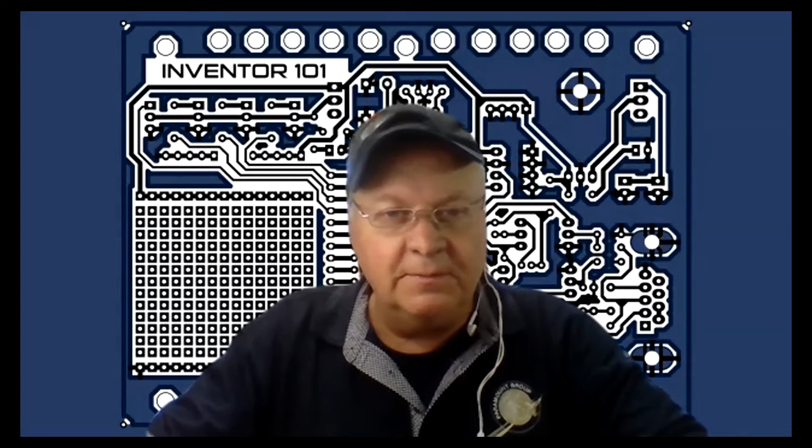Last week, we were busy making this item here. This is a baseboard. So you have various options. If you're getting started with robotics, what you can do is you can acquire this part. This red board over here is, in fact, the main board from this robot.

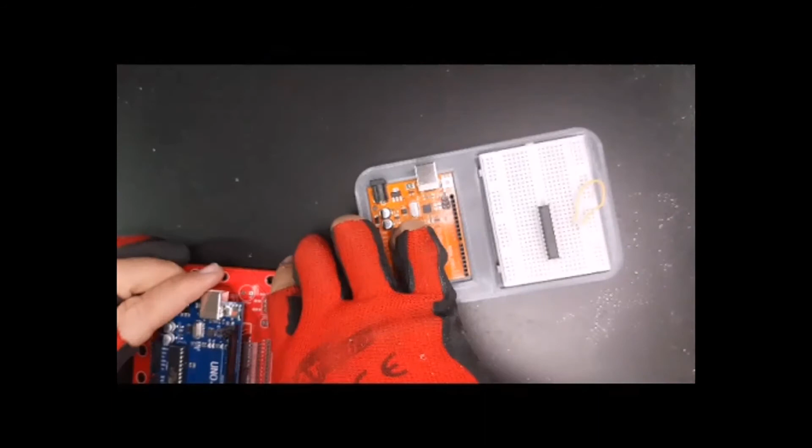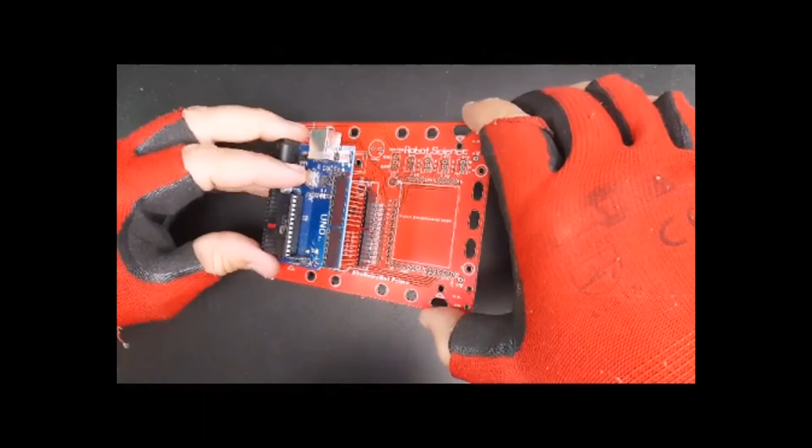But before you build this out into a robot, what we can do is we can just get a hold of this board. In a previous video, we soldered on these header pins here. And then what we did is we put this Arduino Uno that has the long pins underneath it, and we put this on here like this, so we can start programming on this Arduino Uno without the pins short-circuiting and getting damaged.

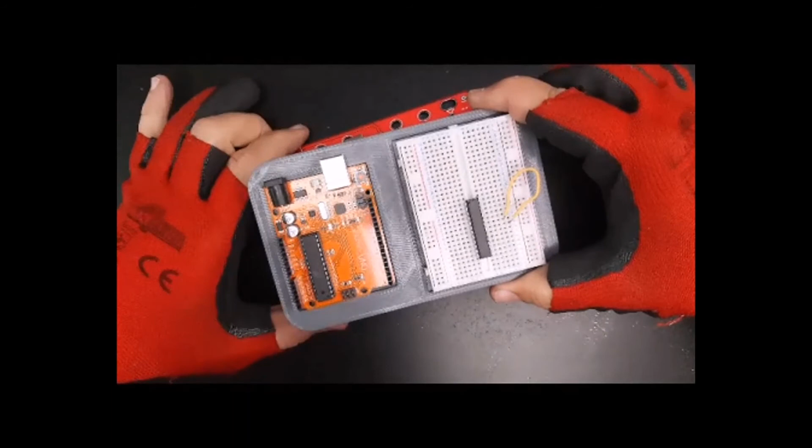We can also put a breadboard over here. What I wanted to do was just design something in Fusion 360 where we've got a bigger breadboard here. We've got the Arduino over there. We've got a little bit of Prestik underneath here. The breadboard is actually permanently attached to this piece of plastic base with double-sided tape. So what we can do here, we can screw this thing in place, or we can just stick it down with a piece of Prestik.

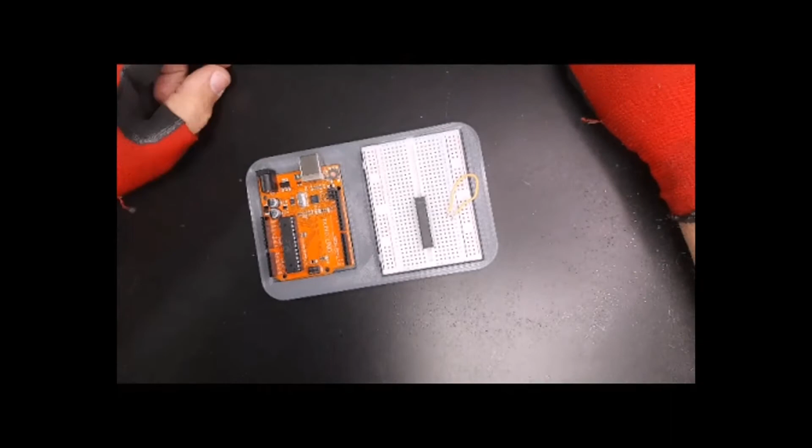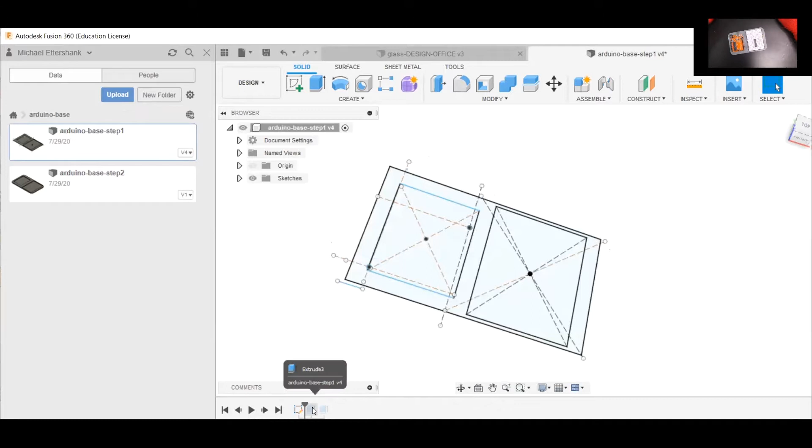So what we're going to do now is we're going to go to a shared screen. This is what we were busy with last week. Move that around a bit. So now hopefully you can see everything that's going on my screen. So if we go back to the very beginning, you'll see there's nothing there. So the first step was in fact to create this drawing. Step number one, we drew the sketch. We drew the blocks on the inside and the outside.

The next step is we extruded the frame 5 millimeters. The next step was we extruded these inner pieces by 2 millimeters. So the main part is 2 millimeters extruded up, and then the frame is 5 millimeters extruded up. The next step is basically to give it these rounded corners.

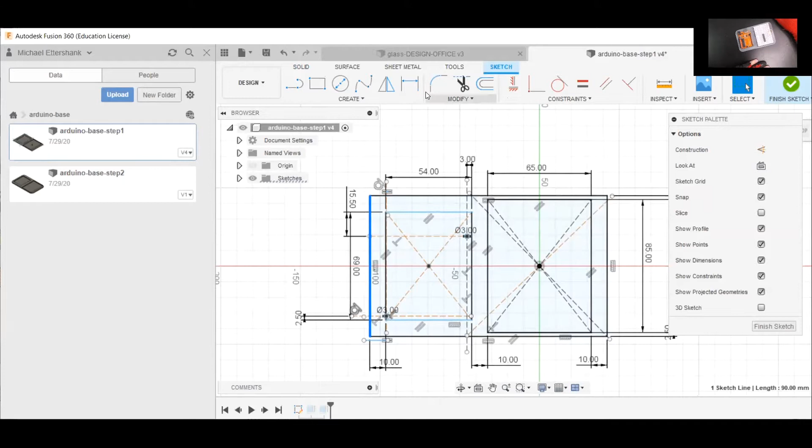So what's happening here is we do a right click on the sketch and we go to edit sketch. And then you'll see there's a fillet function over here. So let's click on the fillet function and we click there and you'll see here it's filleting it, but we don't want it to be so dramatically filleted, so we can click on 5 millimeters and you'll see it gives it less of a corner over there.

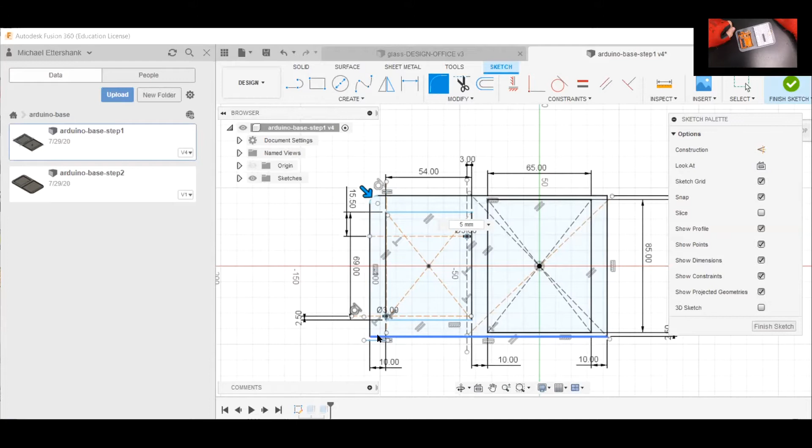So now we go around and we can click over here and it does the same over there, and we go over here and we go over there. So you need to click 2 lines on a square to get a filleted effect. When we click Finish Sketch, what you'll notice now is that this board that we made has got these filleted corners. Now, what we can also do is we can add an extra step here.

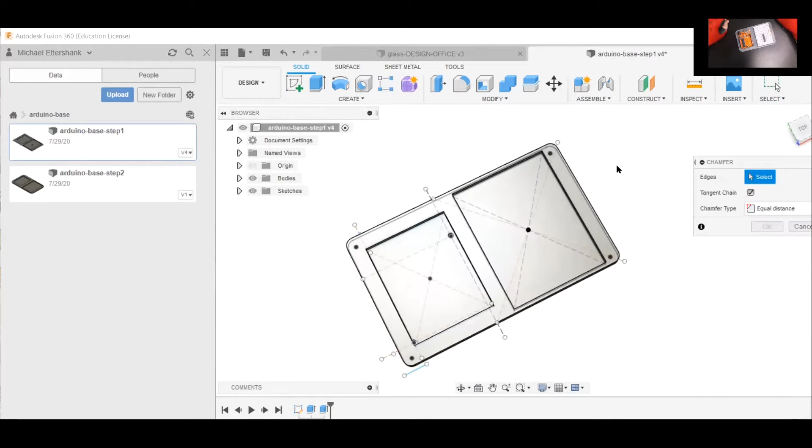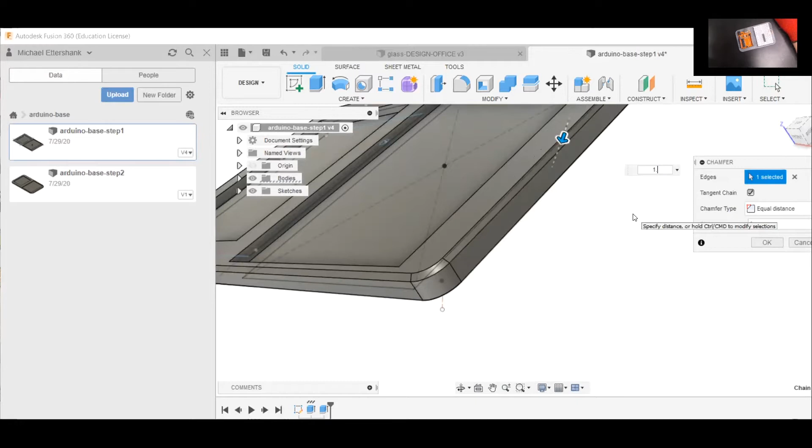So that extra step is we can go here to Modify and we can go to Chamfer. And now, if we click on this line here, it will chamfer this by the amount that we dial in over there. We probably don't want something as dramatic as a 3 millimeter chamfer. You can see that's quite dramatic if I zoom in there. So let's change this number to 2. You'll see it's still quite a strong chamfer there. But let's try, say, 1.4 millimeters. And that's a pretty good effect as far as our chamfer goes, so that's quite handsome.

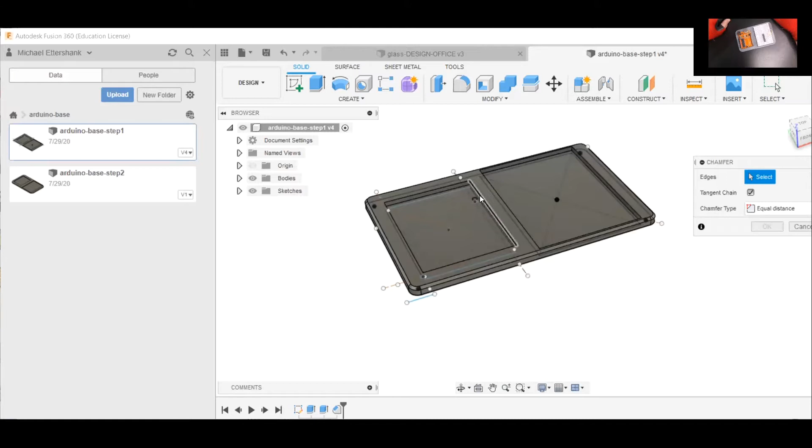What we can also do is we can fillet, that's a fillet, or a chamfer is the square one. We can do the same effect on these lines here. So let's zoom in a little bit and let's do like so. So we click there and we click there and we click there and we click there. So those are the lines that we've included in the chamfer. We can do 2 mils, that's quite strong. So let's maybe do 1.

And now, if we want to include these lines, you can hold the control key down. So if you hover there and you try and click there, it won't include that line because you've already put a value in over here. So if you hold the control key down and you click on that chamfer effect, you'll see that it's inactive.

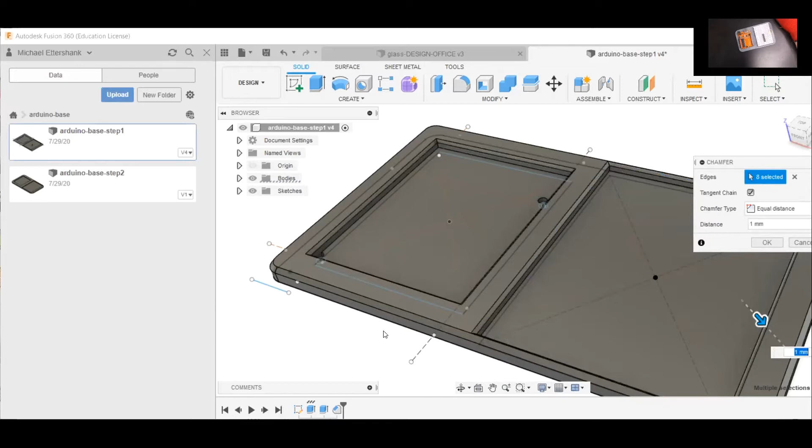If you hold the control key down, it becomes activated or active. So now we've got our chamfers in place, and I think that chamfer is quite strong, so let's go down to 0.75. The reason for that is I just didn't want it to be making a complete V shape over there.

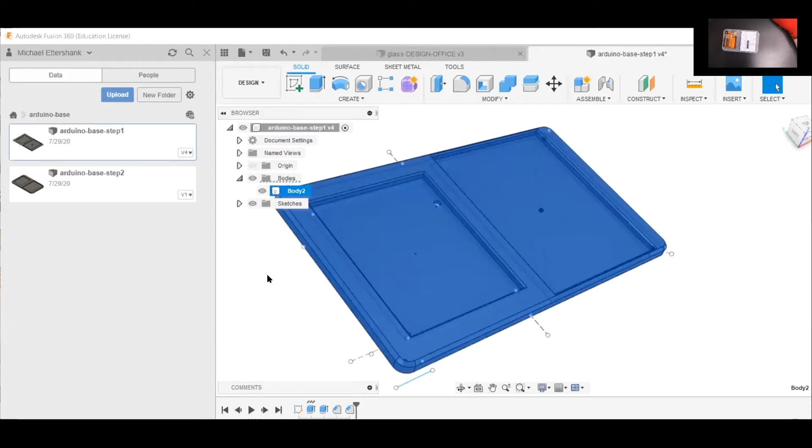You'll see there it's called body 2. This whole part here that's highlighted in blue, you'll see it's gray. When I click there, it highlights that part, that's the body. And if I click here, you'll see this is the sketch. So we can switch the sketches off and on over there, or here we can hide the sketches. Let's get rid of that. We can also hide the body in both places.

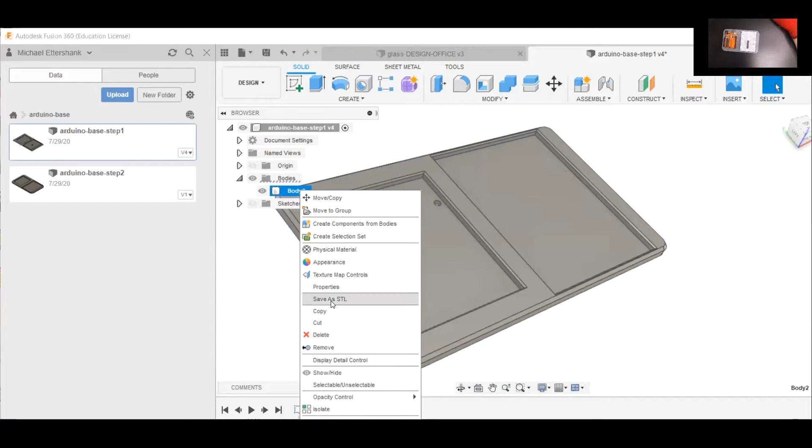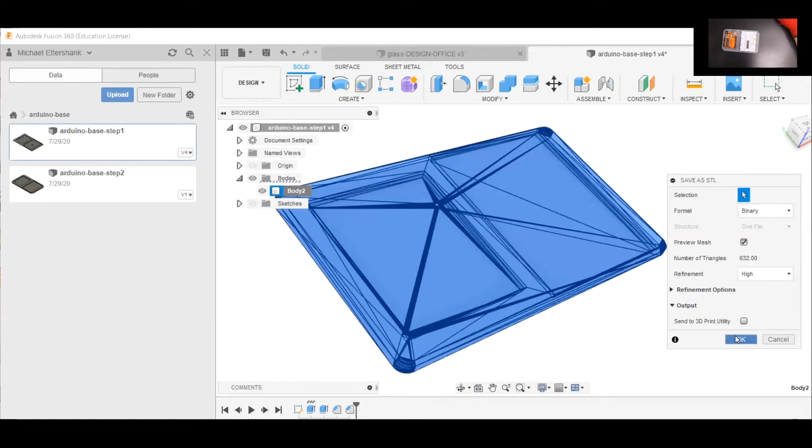But what we need to do now is right click on that body, and it says here, save as an STL file. You'll notice it's now trying to save it as an STL file. So let's have a look at the Save as STL options. You can see we can change this, but I'm going to leave it as a high-res file, and I'll go OK. What it does now is open a save dialog, and we can drag this over here, like so, to there.

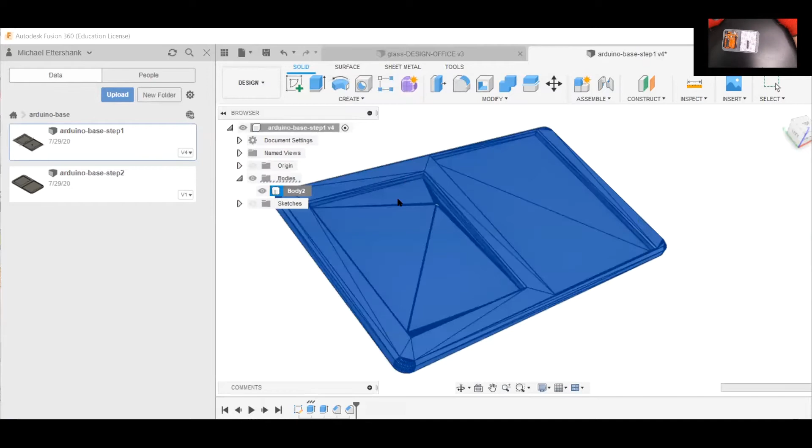And now, under Models, so under my CAD CAM CNC, we've got models here. I'm looking for a model, Arduino baseboard. There's an STL file there, but let's call this version 2, rather than overwriting that one. So now we've saved this effectively as an STL, or a 3D file.

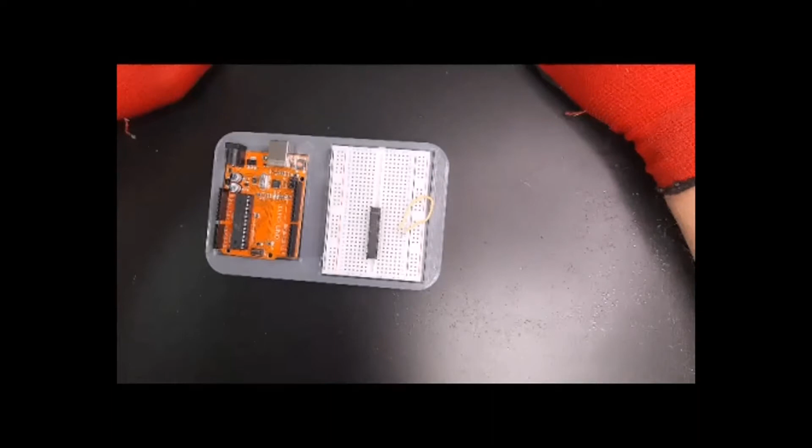Now what we do is go over to a software called Cura, C-U-R-A. What you're looking at there is Ultimaker Cura. I'm just going to clear out that model out of the way there. Ultimaker Cura is called a slicer software, so that's where you take a 3-dimensional STL file and you set it up to print on the 3D printer.

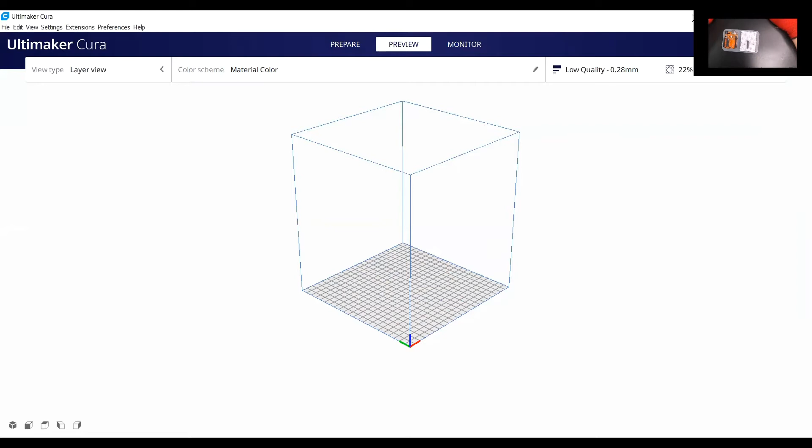The first thing you really do with Cura is make sure the software is set up for your particular type of 3D printer. So I'm just going to pull it up to here so I can see from the top to the bottom of the screen.

So you're looking at Ultimaker Cura now, and you'll see here it says prepare, preview, and monitor. We are going to go to the prepare function. Over here you'll see we've selected a Creality CR20 printer, that's the particular type of printer we're using.

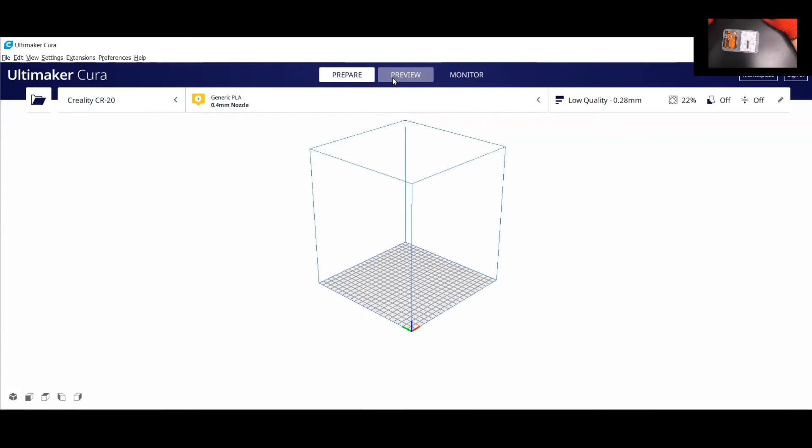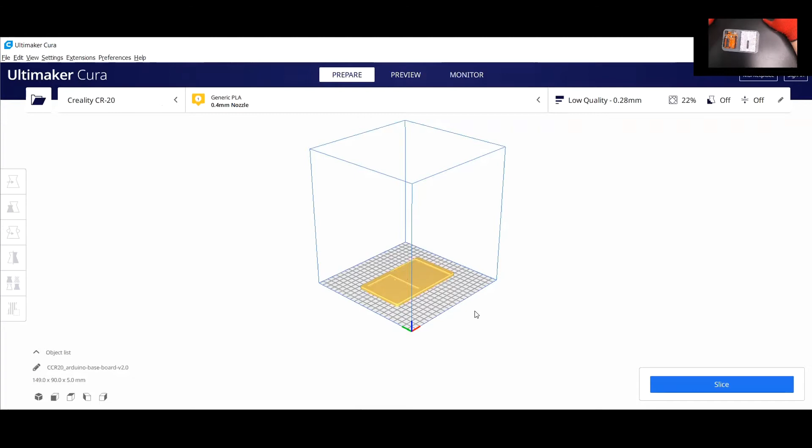What we need to do is bring that model in. So we go to wherever you've stored your files, look for models, and we're looking for the Arduino baseboard model. You'll see here, there it is, that's Arduino baseboard version 2. We click on that and open it, and it actually brought it in there. So what you'll see is there it is. That, folks, is our baseboard.

It's a relatively simple design. Smaller designs are ideal for newcomers. Something useful around the house or your workshop, I can recommend.

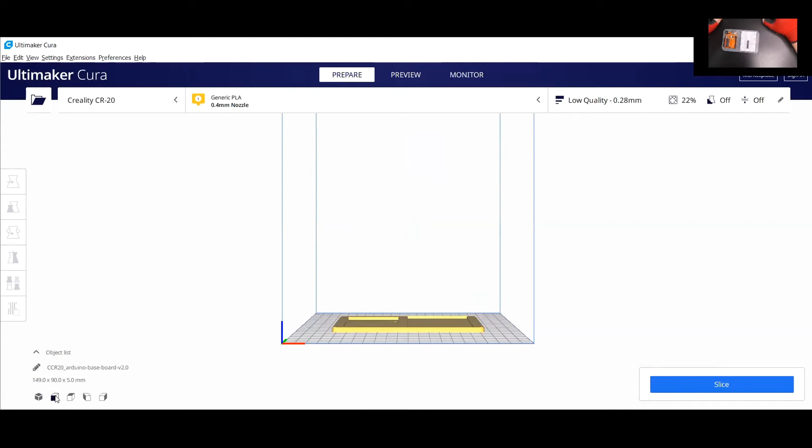And these are the different views, folks. That is a front-on view, that's an overhead view—I'm using the middle wheel of my mouse to scroll around here. This is a side view from one side, side view from the other side. So you'll see it says right view, left view, and this is an isometric view.

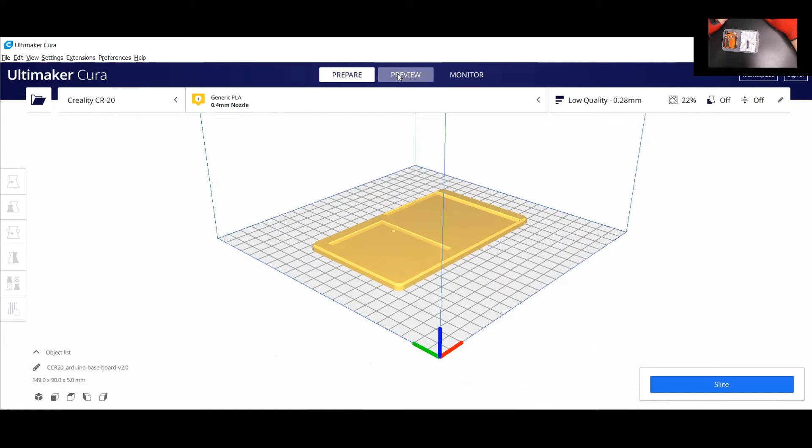So when we zoom in on this part, you can see the actual part itself in the preparation view. If we go to the preview view, then over here there's a button that says slice. Now this model has been sliced—in other words, it's been rearranged so that the 3D printer can print it.

And if we drag this down, you'll see layer by layer, because 3D printers work through deposition of filament. You'll see this is 3 hours and 58 minutes to print. And over here, this is actually recording the different layers. So this is quite a thin model, it's only comprised of 17 layers.

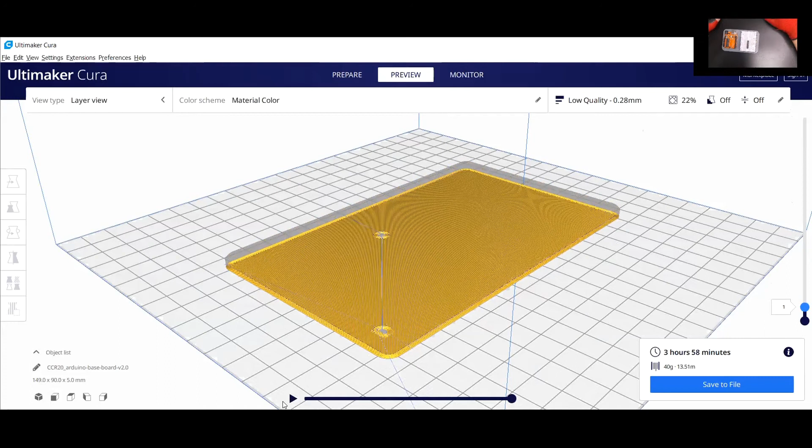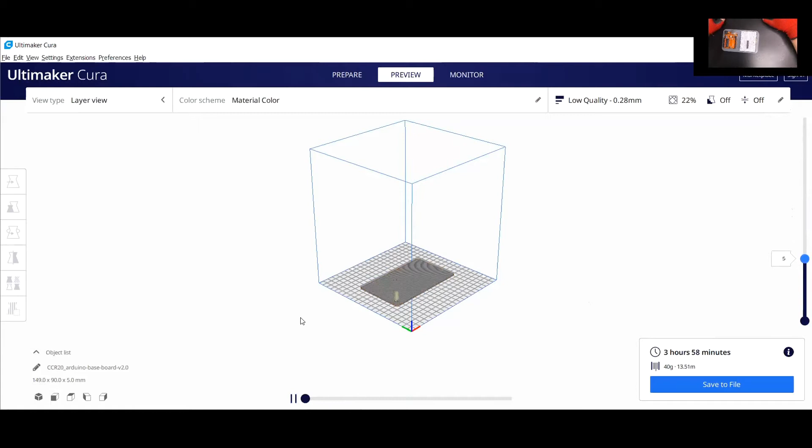If we go down to layer 1 and hit this play button, you can literally watch how the 3D printer puts the filament down onto the bed. It's quite interesting to see. Let's go halfway, say layer number 5, and press play, and we can zoom in and literally have a look at how the 3D printer creates your 3D model by clicking on the different layers.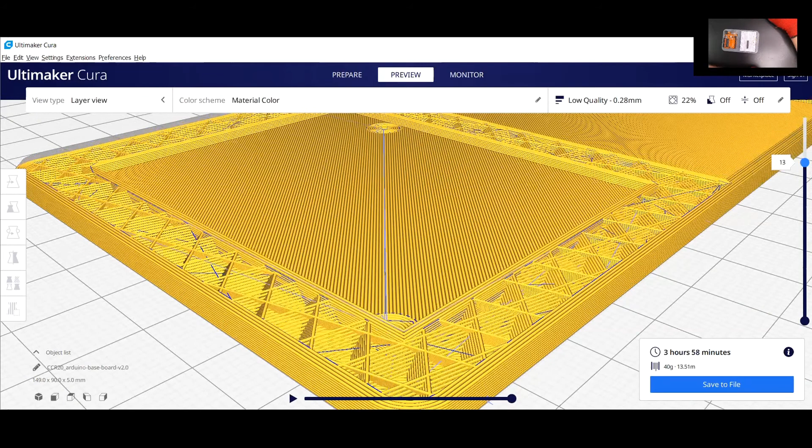So what I'm going to do is walk you through the different functions of Cura, because there's a lot of different settings in Cura with regards to the heat, temperature, and speed of the 3D printer.

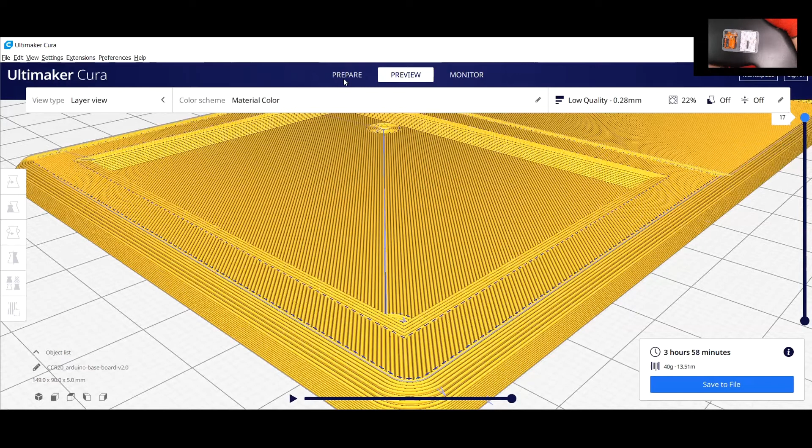So let's assume that everything here is fine and good. You can look at this, this is what the model looks like finished, but in more detail if you click on this prepare view, that's your preparation view, and this is your slice preview view.

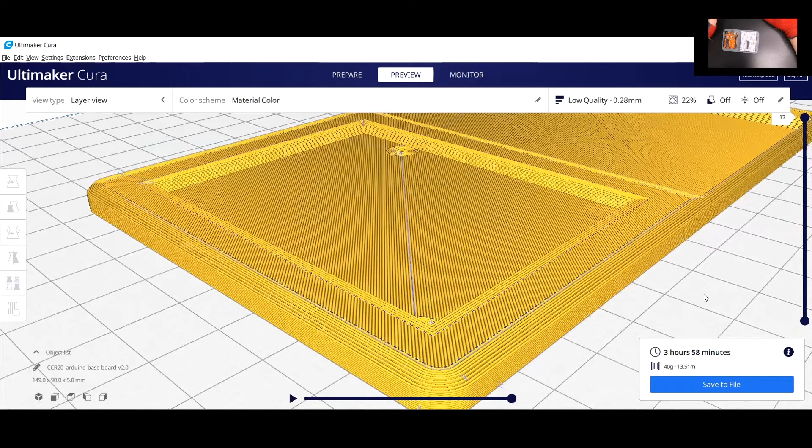And what you're seeing there on the screen is actually how the filament is laid down. It's melted - the 3D printer works through heat, it heats up the filament. It's almost like a very precise, high precision hot glue gun. That's how it works essentially.

And this is an overhead view where you can zoom in and look at the individual lines. There you can see those little stripes and how it builds up this part layer by layer. It's fascinating. Even if you don't have a 3D printer, I'd encourage you to get a subscription to Fusion 360 - it's free - and download the Cura software and start slicing your model, start figuring it out.

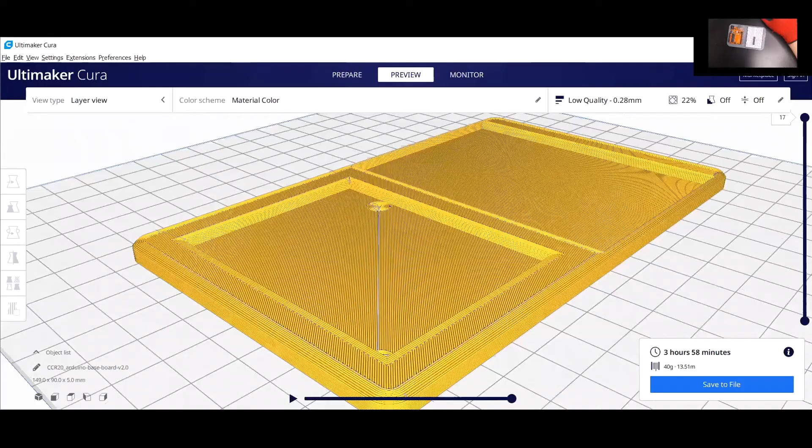Let's go down halfway through the model. So here you'll see this - this is a hollow fill over here. So you can save on printing time and save on filament by going there.

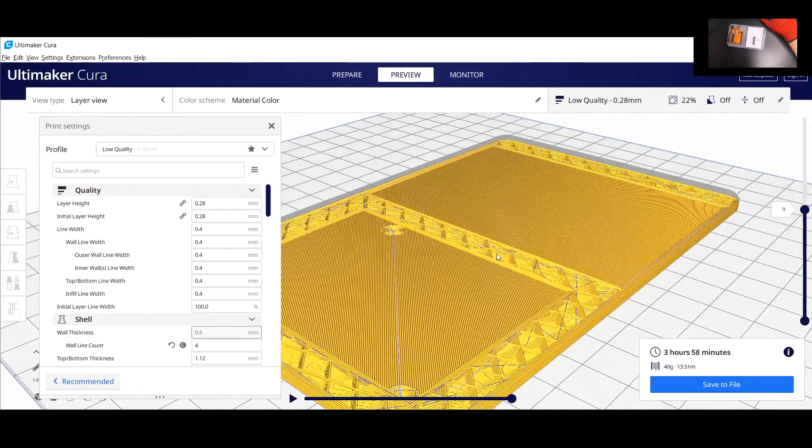Now, these are your print settings - there's a lot of settings here. We've zoomed in on our print settings on that side of the screen. I'm going to move this model a little bit that way, so hopefully we can see everything all at the same time. And now I'm going to find somewhere else to put this item over there.

Let's go through these. So you've got headlines like quality, shell, infill, material, speed, travel, cooling, support, build plate adhesion, and then you've got some experimental settings. These are the main headlines, the main things you have to consider when you are doing 3D printing.

Quality relates to the thickness of the layers. I'm just sticking with some of the presets that are acceptable for this printer, and I'd recommend you do the same - if you're unsure, stick with the default. So what have we got here? We've got layers of 0.28 millimeters. Now, if you don't mind waiting a long time for this model to print, you could change that to 0.2 or 0.1 or 0.25, but for me, 0.28 is perfectly acceptable, so we stick with that.

Your line width - you'll see over here when I hover the mouse, it gives you these little dialog boxes which explain what these things mean. Rather than getting too bogged down in all of this, let's just accept that all of this is pretty good, and let's go out of there and go here.

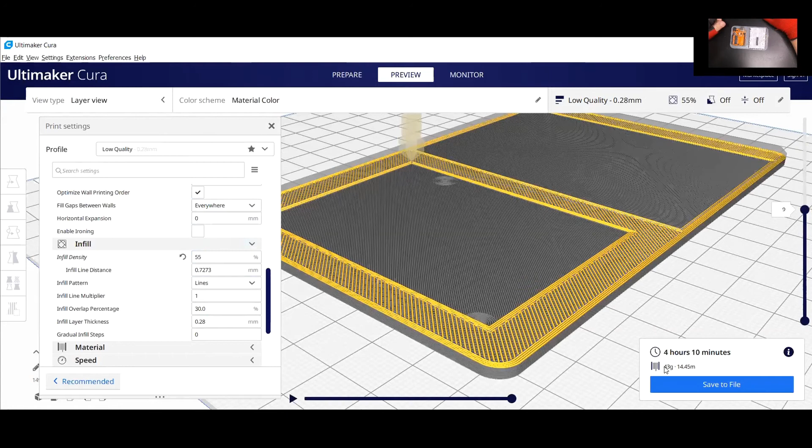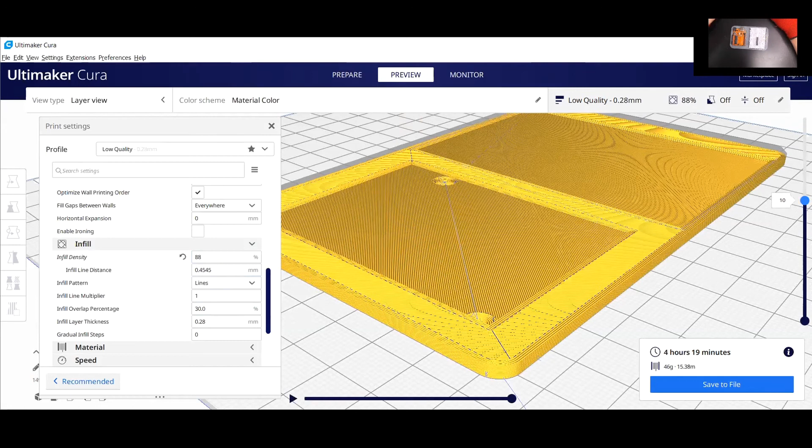Now what you'll notice is that little dialog here, slice. Every time you change the settings on this side, you have to re-slice the model. So what you'll observe now is that if I change this here to say 88% full, and I re-slice the model, you'll see that instead of the model being largely hollowed out inside, it's actually almost solid. You can see that effect there, and then obviously your bottom and top layers are solid.

But if I change this back to say 11% over there, and I re-slice the model, you will notice that it's mostly hollowed out in these thicker sections. The thick sections are over there and over here, and it's hollowed out. So let's go back to 22% because that's a nice sort of value somewhere in the middle.

Now let's have a look at the effect on printing time. This model is going to take 4 hours, believe it or not, to print this little board. But that's because I don't like to print on a very high speed. You can speed up the printer, but then sometimes the quality of the printing goes down.

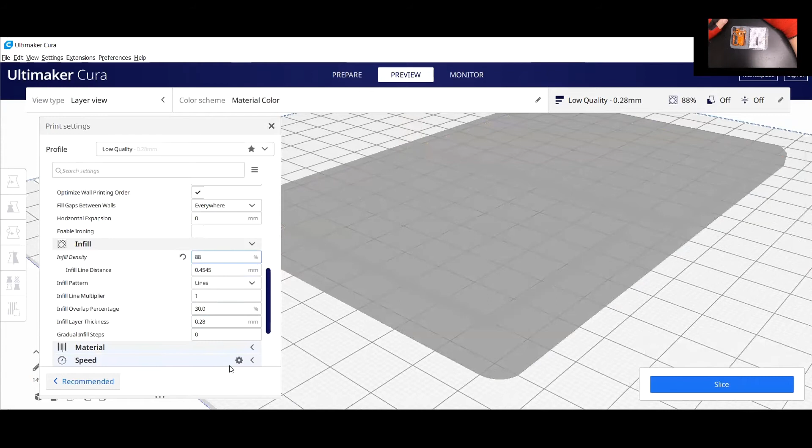So let's have a look at the effect of making this say 88% on the infill density. And if we slice that, now the model is 4 hours and 19 minutes. So it does take longer to print. Let's go back to 22% and see the effect on time there. These are estimations, so it's 3 hours, 54 minutes. This model doesn't have a lot of hollow parts, so it doesn't make a massive difference.

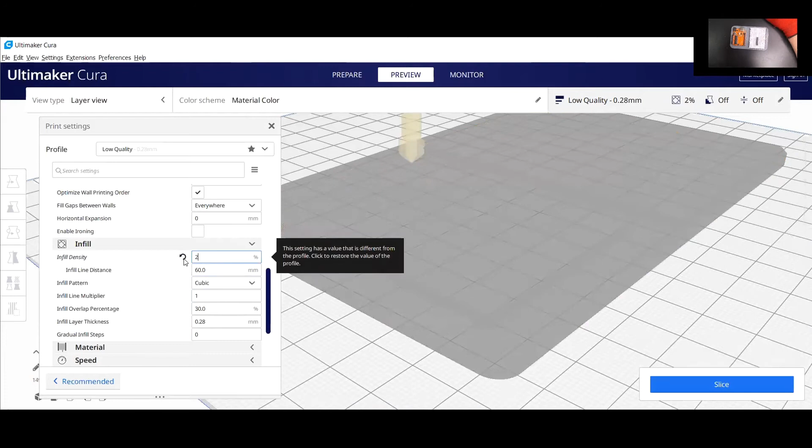But let's go and have a quick look at the effect of the layer thickness, the way you lay these down. So if we want a really finely printed model and we go down to 0.1 millimeters and we slice that, now the model is going to take 7 hours and 49 minutes to print.

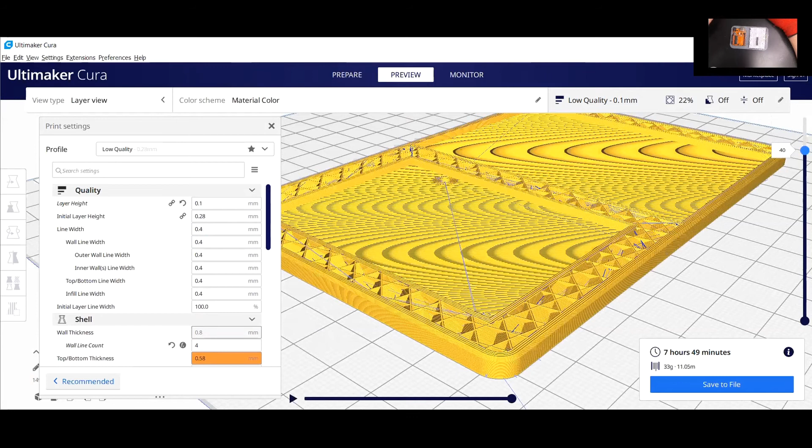And for a model like this, you don't need very fine quality, and it's now gone up to 40 layers because each layer is so much thinner. So let's have a look at these thin layers. You can see the 3D printer is going to put down very fine, very thin layers. Personally, I don't think that's necessary.

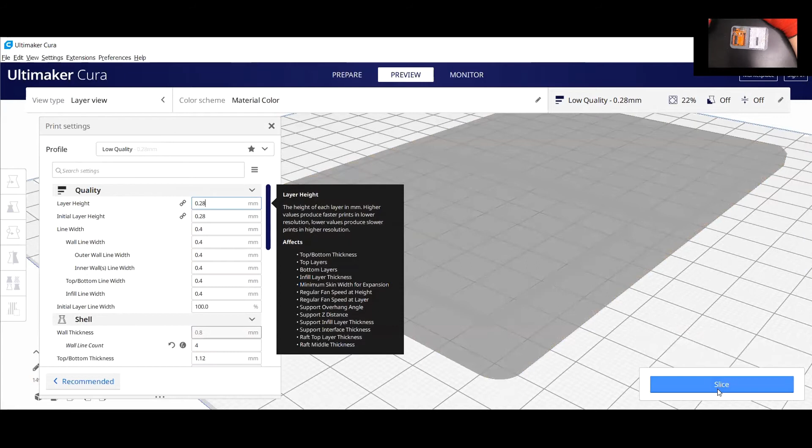We can go up to say 0.3 and we re-slice it. Let's have a look at the effect on time. Now it's more or less the same as what it was before, because before it was 0.28. We slice that, and there we go. So it's slicing, and that's 3 hours, 58 minutes.

And all these other numbers here are really fine tuning that you can spend a lifetime figuring out what effect they have. It's really a very practical exercise. There's no definitive answer to what might work on one model might not work so well on another model. Smaller models tend to print easier than larger models.

Now, material-wise, this will determine your printing temperature. Now, the recommended printing temperature for PLA, that's polylactic acid, which is what I normally print most of my stuff in because it's just convenient. It's a very easy material to work with. It's not too temperature sensitive. So the recommended value here for printing temperature is 200 degrees.

But I find that the environment here, these offices are a little bit cool with the air conditioning. So I find that if I dial up the printing temperature to say, so if we stick at about 212, somewhere around there, we get good results because that PLA is coming out of the extrusion nozzle at quite a high temperature. It's pretty molten.

It very quickly cools down and forms onto the part. Sometimes if you print with your nozzle temperature, your extruder temperature, too low, you get a stringy model that doesn't have any internal strength. The layers literally just break apart. What I've found with my particular type of PLA and the particular printer that we have here is that somewhere between 200 and 222 degrees Celsius is a good temperature to work with.

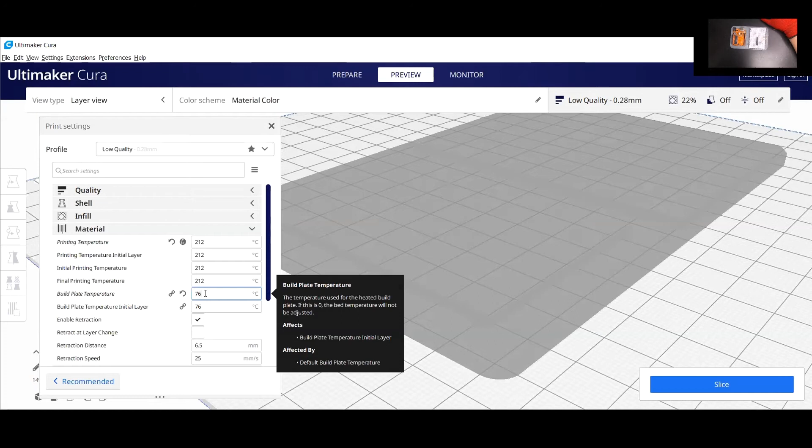If you're out there and you're an experienced 3D printing person, you might be critical of all of this. You'll also look at my build plate temperature. Now, we have a 3D printer with a heated build plate. I don't recommend buying a 3D printer if it doesn't have a heated plate because it's quite tricky. There's a lot of problems if you don't have a heated print bed. So the recommended temperature for the print bed is normally 60 degrees for PLA, but you'll notice here that I've got this thing dialed up to 76 degrees Celsius, which is pretty hot.

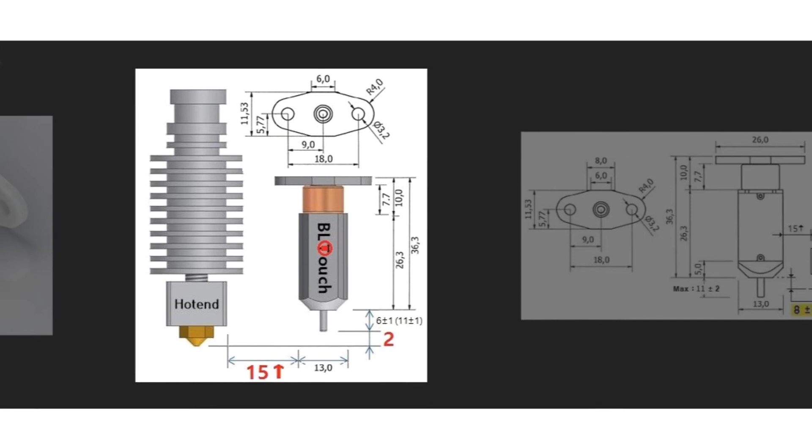If you wipe that print bed with a wet or damp cloth, it actually gives off steam. It's so hot, that print bed. But I don't use hairspray, because if you have a 3D printer with a BLTouch sensor for setting the height and doing bed leveling, and you get hairspray into the BLTouch sensor, it stops working, and they're like 500 odd rands to replace every time, and they're almost impossible to get working once they're gunged up.

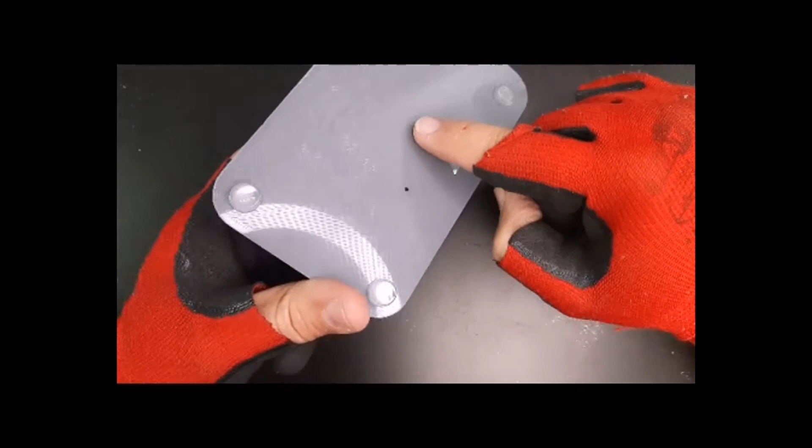So I don't use tape, I don't use anything. I literally just print the PLA plastic onto a mirror these days. I get a beautiful mirror-like smooth finish, because this is literally printing onto the mirror. There's no glue, there's no Pritt glue, there's no hairspray, nothing, and it's literally got a mirror-like smooth finish. And it's really very nice because once the printer stops and cools down, this just pops off the print bed. You don't have to prise it off the machine and mess up the alignment of your 3D printer.

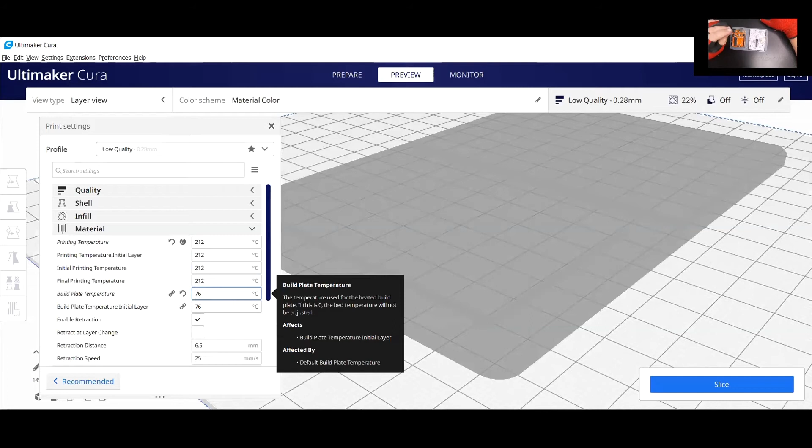3D printing is all about fine tolerances and alignment. And if you watch the videos on YouTube, they're recommending that you use a paint scraper to prise your model off the print bed. It's all crazy. I don't recommend that at all. To get the model to stick to the mirror, I heat the mirror up so that the mirror is so hot that the PLA, polylactic acid, is a little bit soft, and it's grabby and it sticks to that mirror like crazy. If you try to pull it off the mirror, it doesn't really want to come off, but once the mirror cools off, the model literally just almost pops off the mirror.

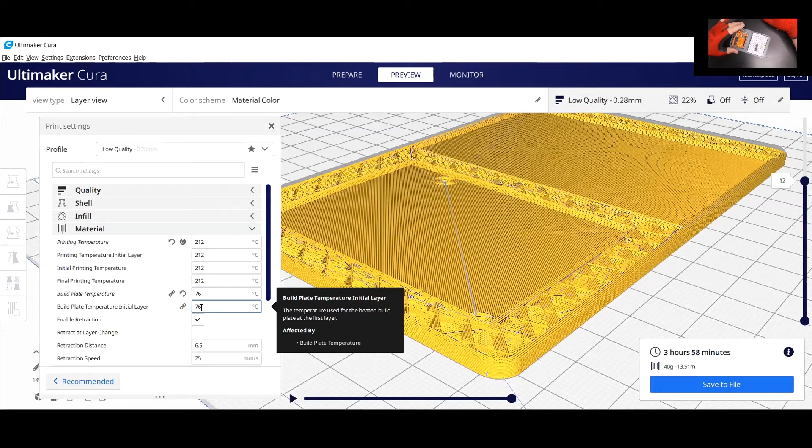So that's something that took me a long time to discover, and a lot of frustration, a lot of hairspray and gunged up BLTouch sensors and all sorts of things. If you're printing onto a mirror, somewhere between 75 and 80 degrees Celsius on your heated bed. If you don't have a heated bed on your 3D printer, you might want to consider upgrading to a 3D printer that does have a heated bed. Otherwise, you're going to be using blue painter's masking tape to print onto. That's your temperatures of your materials. I'm not going to talk about ABS and all sorts of other specialized materials. Before you've mastered PLA, I wouldn't even recommend that you try looking at other materials.

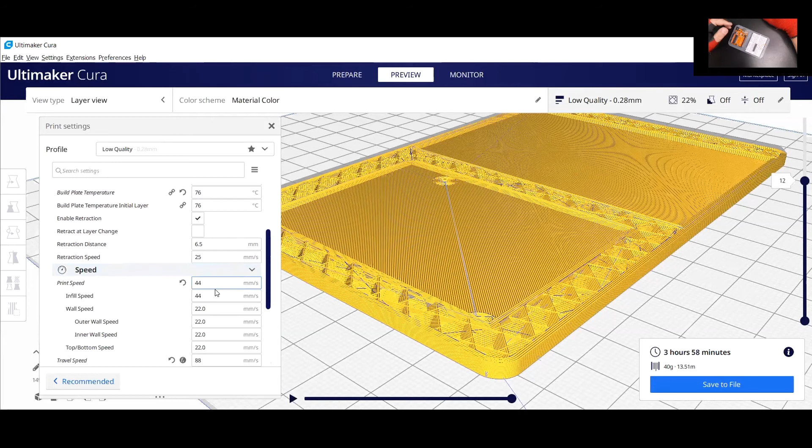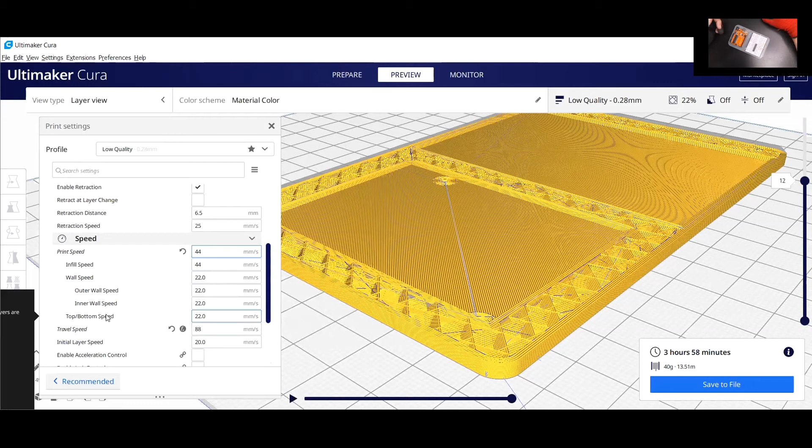Speed-wise, you can go with your defaults for your machine. Some people are printing at 100 millimeters per second and 80 millimeters per second. I would rather know that my model's going to come out right and everything's good. So we're just sticking with 44 millimeters per second here. Your wall speed's a little bit slower. So you really can fine tune all of these settings. One thing I do is I normally slow down my travel speed slightly.

The filament needs to be heated up to the correct temperature at the correct moment in the printing process. But it is equally important that the molten plastic that's coming out of the extruder also needs to be rapidly cooled off. Otherwise, your model just turns into a lump, a blob of molten plastic. So the PLA must come out hot and it must quickly cool down to form a solid for the next layer to land onto. So stick with the defaults over here. Keep your fan speeds up at 100%.

But later on, once you start to become more advanced, get onto YouTube, watch all the videos. There's literally hundreds of enthusiasts out there, some who know what they're talking about and some who don't, giving lots of good and bad advice. So check that out.

Now, this one is quite important. This is called support. Under the headline support, if you click on that, it opens up a whole section. And usually, when I'm thinking my design through at the Fusion stage, I'm already thinking in terms of what it is.

Am I going to be printing the model on a 3D printer? That's the most important question. Are you going to make your model on a CNC machine? Because the approach to your design changes according to the destination or the machine that you're going to make your model with. So the moment I know I'm going to make something on a 3D printer, my entire design is designed around trying to make it optimal to print on a 3D printer.

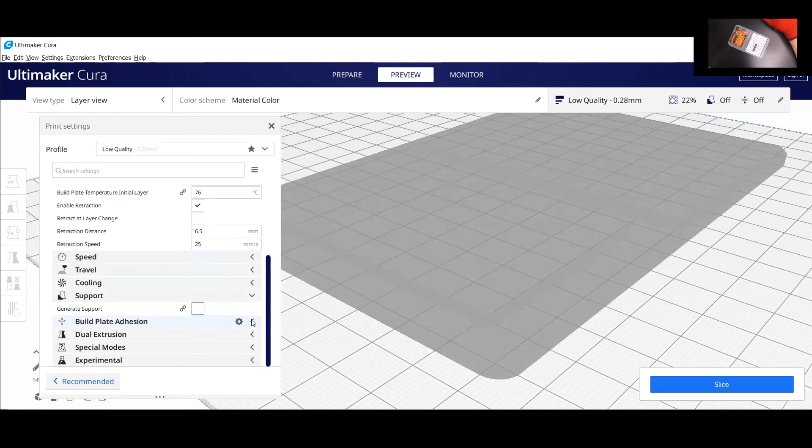The next thing is called build plate adhesion. Now with the system I'm using now, in other words, I'm using a mirror that's very hot, which keeps the PLA sticky and sticks the model, the models are not being bumped off or knocked off or falling off or warping off of the print bed. So I'm generally printing with no build plate adhesion features.

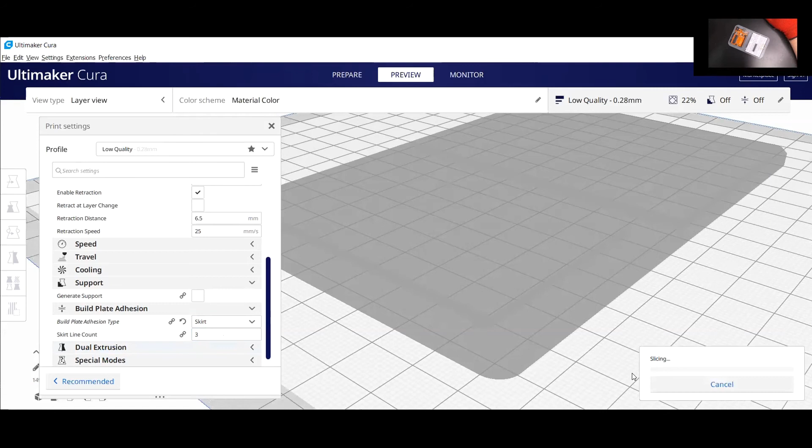But what you can do is you can have a skirt. So let's reslice the model each time just to see how this changes things. So what you'll notice now is there's a few lines around your model. Now, a lot of people print a skirt like that just to let the 3D printer wipe its nozzle clean before starting work on the model, because the 3D printer will only start printing when it reaches temperature, and then normally there's a blob of PLA that's come out of the extruder and it ends up in your model and it causes all sorts of troubles for you. So a skirt is a good idea, but it doesn't really help the adhesion qualities of the model.

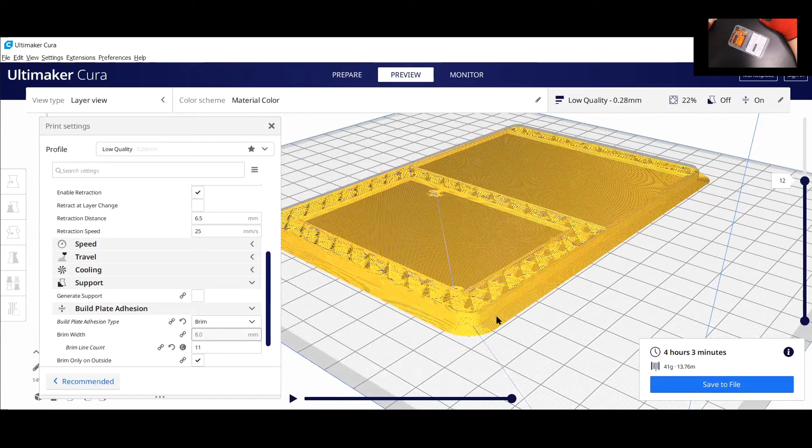A brim, and I'm just going to reslice there, a brim is quite a useful thing. You'll see the brim over there, and let's go to the top of the model like that, and if you look at the model, the brim is not part of the model. So the model is there. If we preview the model, you'll see this brim appears. So what the brim does is it adds almost like an extra bit of plastic around the edge of the model, because models tend to curl up as they cool off, as the different layers of plastic go on. The model cools off and it tends to curl up from the outer edges. This brim feature holds the model down and gives it extra stick.

So sometimes, depending on the size, the bigger models I usually do a brim, the little ones I don't do a brim, because obviously if you use the brim, then when the model's finished printing, you have to cut the brim off, and that can be fiddly and time consuming. So now you can choose how many lines in your brim. So you can do 88 lines in your brim. If you're really worried that your model is going to pull off the print bed, you can do a very wide brim.

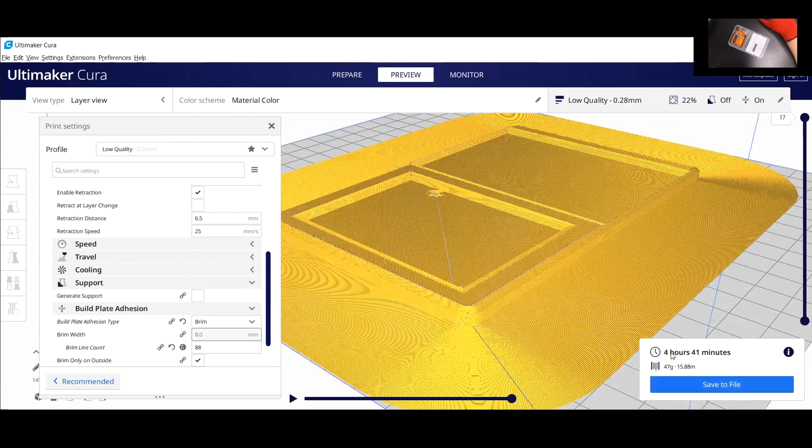So if I'm printing more than one copy of, say, a little box to put electronics into, I might widen my brim because the first one that I printed curled up a little bit on the edges, and I just want more meat to stick the model down to that mirror. Obviously, it does increase the print time of the model, but not too dramatically. So 4 hours, 41 minutes. Let's take that down to probably 11, which is probably a good compromise. So that's now 4 hours and 3 minutes.

There's another option here, which is called a raft. A raft is for where you're having real problems with the model sticking to the build plate. So you actually print an entire raft down onto the build plate, and then the model is here. So if we have a look at this, there's the model, and then we go like that.

The only problem with the raft is now the model prints to the raft. And when you peel this model off the raft, then you have to sandpaper the other side of this item because it's got all these little points where your model printed on top of the raft. So it's easy enough to separate the model and the raft, but it does leave a few what's called artifacts behind, which can spoil the beautiful, clean look of your model.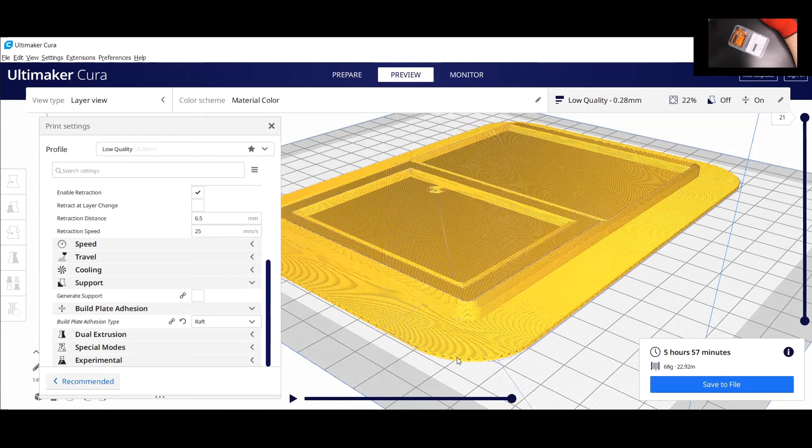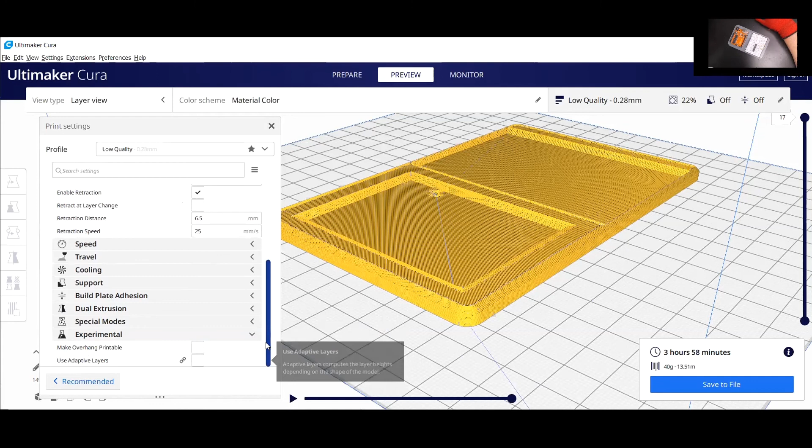Then the next option here is none or nothing. So if we look at that, we reslice the model, and you'll see that the prepare view and the preview view of the model is exactly the same. Under experimental, there's some interesting things there. These are all things that are completely beyond the scope of today's presentation.

The final thing that you need to basically do, before you're going to print, is just scroll this up and down, have a look at your model, and make sure you're happy with what you're seeing. You can even just have a look. This is the last layer printing. Just have a look at the speed and the movement of the head, and make sure that everything looks sensible.

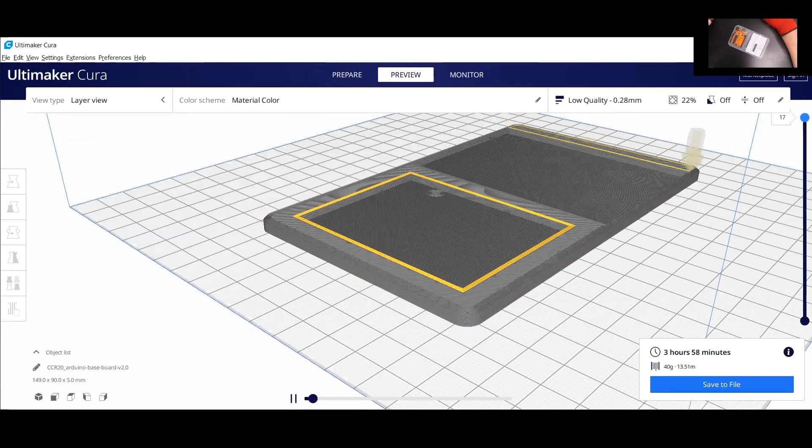Once you're satisfied with everything, you can connect a 3D printer directly to your PC. You can network them and do all sorts of things, but most folks just put a little memory card into this little micro SD card slot. We put the micro SD card in the holder, and I've put the 3D printer on preheat mode so it can warm up so long.

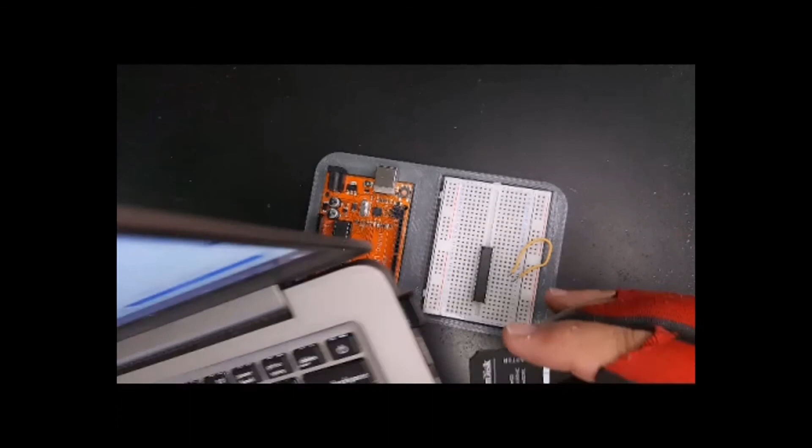And now I'm going to put this micro SD card into this computer's micro SD card slot. Now you'll see this is flipped over. It says save to removable drive. So this software has detected that we've put a micro SD card in there, and it's as simple as just clicking on that. It's now copied it to the micro SD card. We can eject the card, and we could put this in the 3D printer and press go, and it should just print.

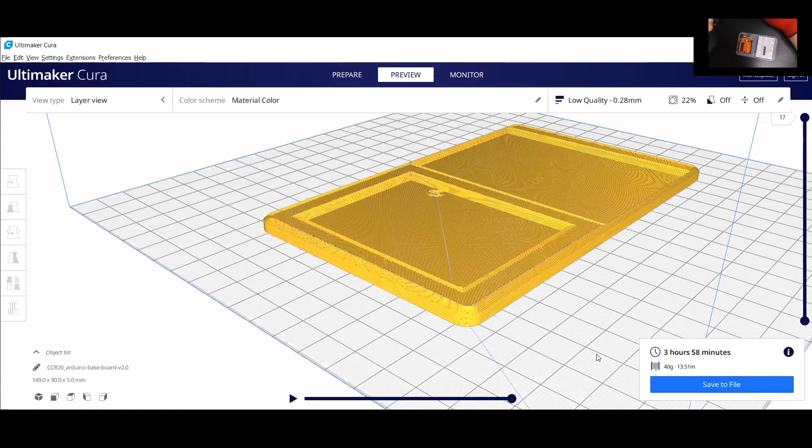So we're going to go back to the 3D printer, and we're going to start up the 3D printer. Now I've set it to the preheat PLA settings, which is a bit below my temperature settings, which are much higher. So it'll take a few moments to get going, but let's go check that out. The 3D printer is now starting the print job. First thing it does, it wipes a line down the edge there. You'll see it's printing onto a mirror, and then it goes to the middle.

And so now what it's doing is it's basically printing out that shape. It's going to put down the first layer. So I'm just going to take a stroll over there and check everything's going fine, but it looks all good so far. So it's put down some of those holes. If there's little shapes within your shape, it'll put those down, and now it's putting the surround around it. And so it's going to carry on for quite some while until it's done.

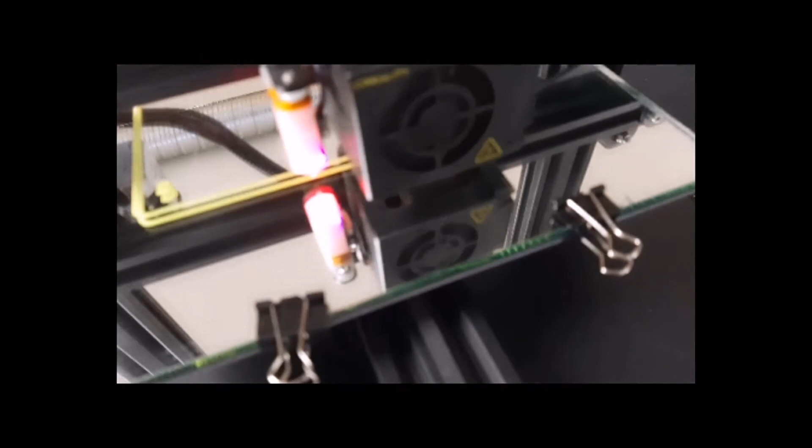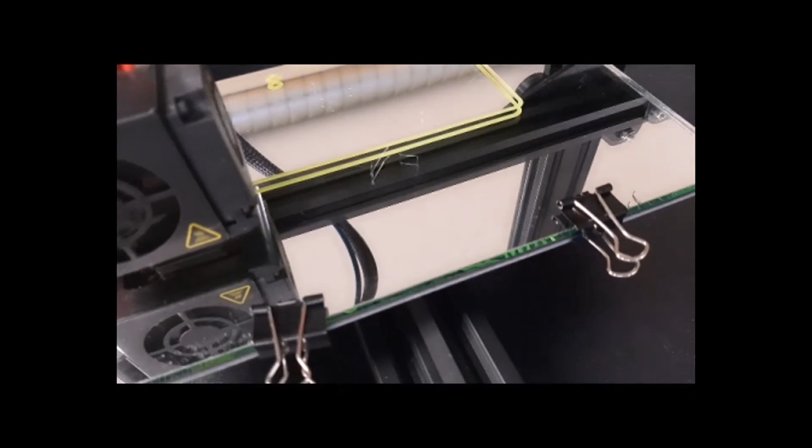With the mirror printing method, you clean the mirror just with plain water on a little bit of tissue paper, and you keep that mirror spotlessly clean so that you don't get little bits of dust and stuff included in the print of your model.